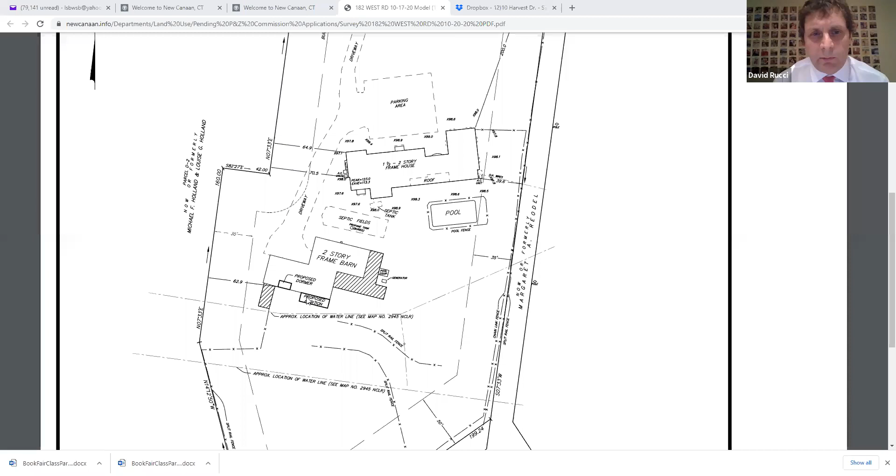Right now the particular... I'll let the Scatinos talk about the architectural part of it when we get there. But you can see on this survey that you're looking at now, the striped or hatched areas are the ones being removed. There's a small proposed addition on the back that just sort of bumps out the back of this particular barn. The sections that are being removed — if you could go to drawing number 4, please.

To go to drawing 4, I'll get it for you. Yes please, I just want to show you — actually Lynn, can you go to 7 first? I think that might be the easiest thing to show. The architectural drawings? No, just in the email I sent with the exhibits for the hearing. Oh, they're all up, everything is up. Do you want the architectural, or — we just labeled them based on how people would find them. They're just pictures. Oh, the pictures, okay, yes. It's listed as number 7. Okay, give me a second, I'll get it.

Sure, I just want to show the commission essentially what the building looks like today, and then I'll go through what our proposal is and what we're essentially taking off this particular building. It's important to note that the areas we are taking off are not seen from the street — you can't really see these. So here, if you see the existing barn, the front of it, that's essentially what is remaining, or a large part of it. There is a small area on the back side of the barn, about 12 feet, to be removed. And then you can see on the bottom what we're proposing to do. We're going to use all the same windows that we can, all the same refurbishing of the sides. We're going to keep the doors off to the left there, and the same windows and color. Essentially what we're trying to do is modernize it enough so it can be used on the property for something other than storage.

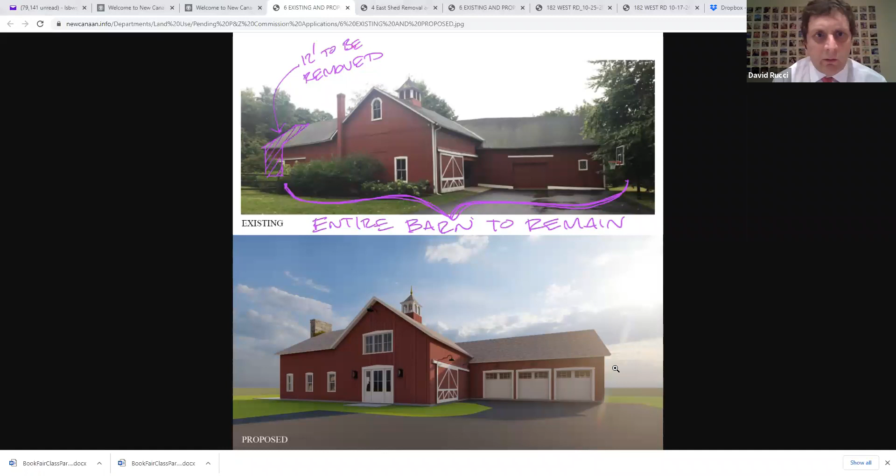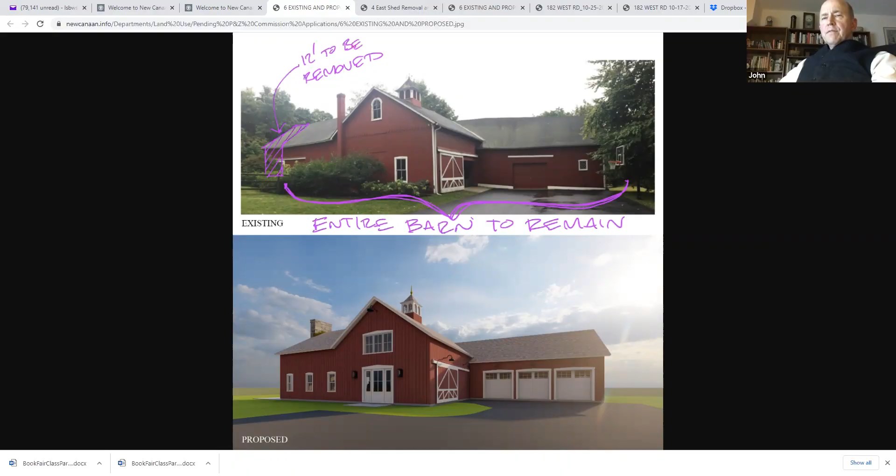Also, if you could go back to the photograph of the current building. Sure, that's number 7. Or do you want the proposed one? Or 6, is that the one you were looking for? No, it was another photograph of the side piece in the back that was going to be taken off. There's another photograph. That's going to be 4 or 5. That's what you're looking for. John? Yes, that's it, thank you.

The lower picture, I'm looking at, there was some pool equipment you have there, as well as some electrical on the side of the building. Since you're going to be expanding there, I'm wondering what's going to happen to all that electrical, mechanical stuff. Yeah, I can answer that. If you look at the proposed drawing on the east side, there'll be a new stone fireplace there and French doors. So all that pool equipment and any mechanical will be relocated to another location within the setbacks, obviously. So that has to be relocated.

And the construction materials for the addition, I assume it's going to be wood. Yeah, the current building has barn siding, it's pine, it's been painted. We were going to reclaim some of it and then install new boards where necessary, but try to keep the same width of the pine, etc., and patch where we have to. The idea is that it would be a sympathetic development to the 1700s barn as far as building materials and style. Totally, we're very respectful to this building.

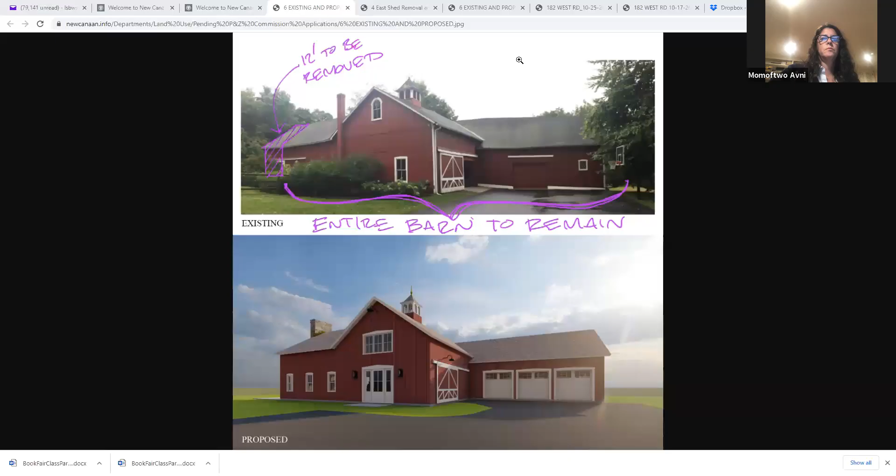That's the one you're looking for? Yes, just so they can see it. Okay, so this is Art Cassavant.

I have several questions for Mr. Scatino or Mr. Scatino Jr. I'll ask my questions and you can deal with them in whatever order. First, I presume this is a post and beam structure sitting on an original foundation. I presume you will not be building a new foundation, or will you? And what is the square footage of the residential area, excluding the garage?

Good question. I can answer the square footage first. It's about 4,000 feet of the first and second floor area minus the garage. I think that's pretty close, 4,070 feet.

The second question is also important. We've had our PE out there, David Seymour, a couple of times, and we want to preserve the stone foundation. Some areas are good, some will be removed and underpinned. It'll be selective. The front, correct me if I got this wrong James, was in pretty good shape, with some areas underpinned and patched. It's a case-by-case situation. On the left side, where we're putting the fireplace and there are new doors, we'd probably underpin that whole side, but it's a big part of the structure.

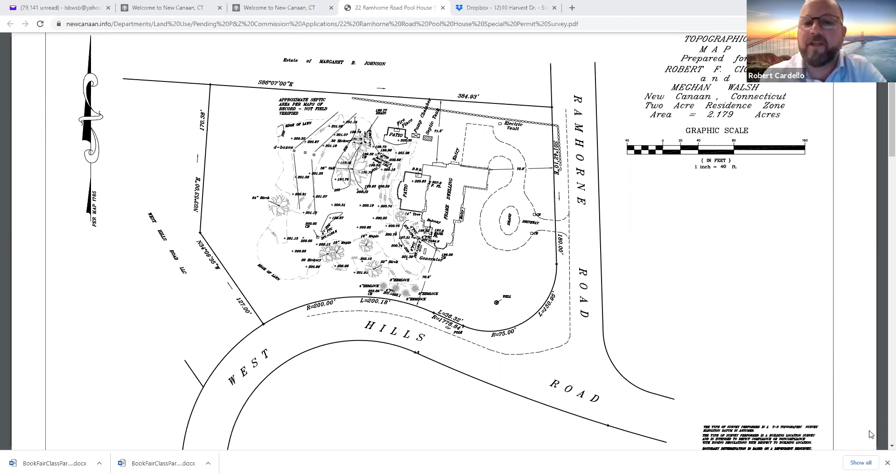The pool house has about 1,000 square feet, just under, of heated indoor space, and about 400 square feet of covered outdoor space.

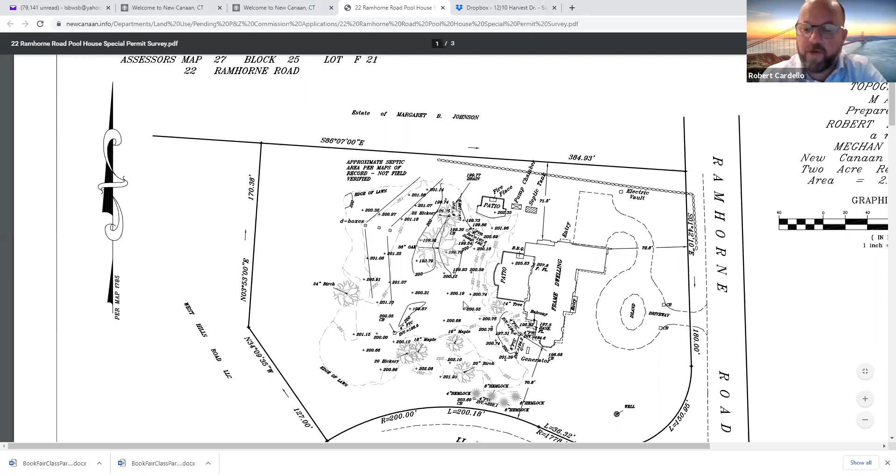We're here tonight to ask for a special permit under section 3.4-C7, with a pool house exceeding the allowable accessory structure size of 1,000 square feet.

And we are also asking for a special permit for section 3.4-C6, which is the accessory structure in the front yard. The closest point from West Hills Road to the existing house is 70.6 feet. The closest point from the property line to the pool is 66 feet. The pool house will be behind the pool itself.

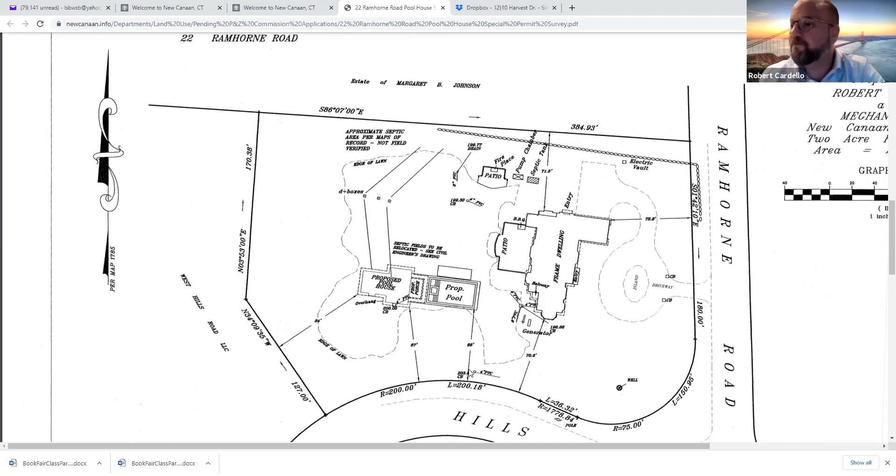I'd like to mention that there's no cooking facilities in the structure. The building conforms to building height.

I would love to give our civil engineer an opportunity to tell you a little bit about what he's done on this property to facilitate the drainage and the septic, and then maybe we could take some questions.

Please proceed. Sure, can everybody hear me? We can hear you. Oh, thank you. For the record, my name is Todd Ritchie. I'm a professional engineer with Milone and MacBroom.

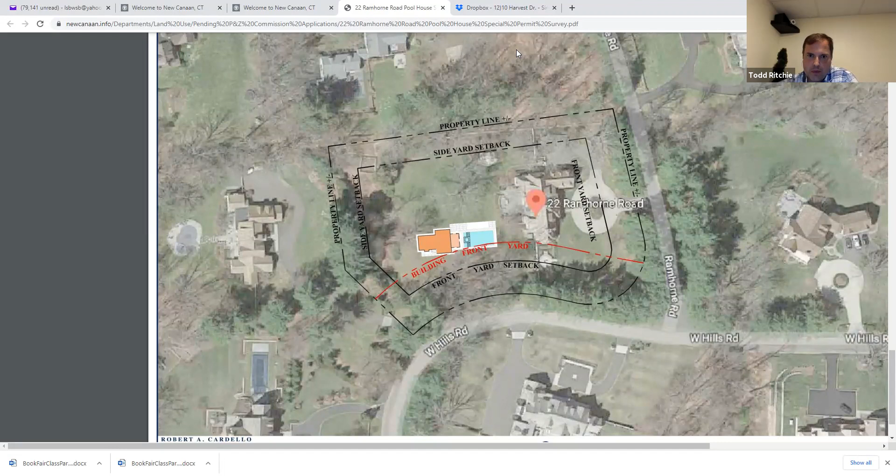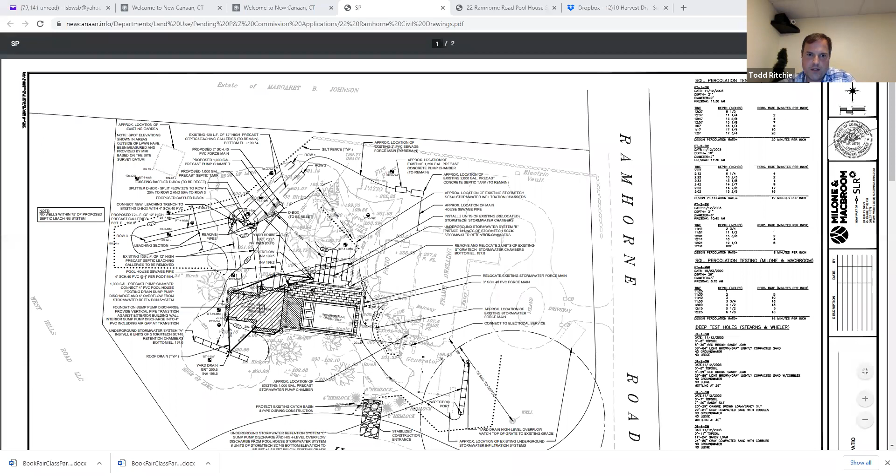I guess we could put up the site plan. Give me a second, but you can start talking. Okay, thank you. Just a little background—I had previously worked on this property back in '05, as Bob mentioned, as part of the original redevelopment of the property into the 6-bedroom house that's on the property now. We did the design of the site, the septic, and the drainage, so I'm familiar with the property. There's been some things updated over time that I wasn't part of, but originally I was part of the team. This is the site plan we put together associated with the pool and the pool house.

Just a little background on how the drainage flows on the site—the drainage patterns. Essentially the drainage flows to the east and to the west, and there's sort of a bowl in the back where the couple of trees are in the center, and part of the pool and pool house is within that area as well. Currently that drains and infiltrates into the ground through a stormwater infiltration system, and if it exceeds that, there's natural pathways towards the rear of the property. There's also a pump chamber at the walkout of the rear of the house that pumps water away from the house.

So for this proposal, we have to relocate part of the septic system because it will be within 50 feet of it with the proposed pool house. The pool itself has to be 25 feet from the septic, and since the pool house will have a lower foundation and foundation drainage, it has to be 50 feet away from any component of the septic system. So we're essentially keeping half of the system, the northern half, in place as it is.

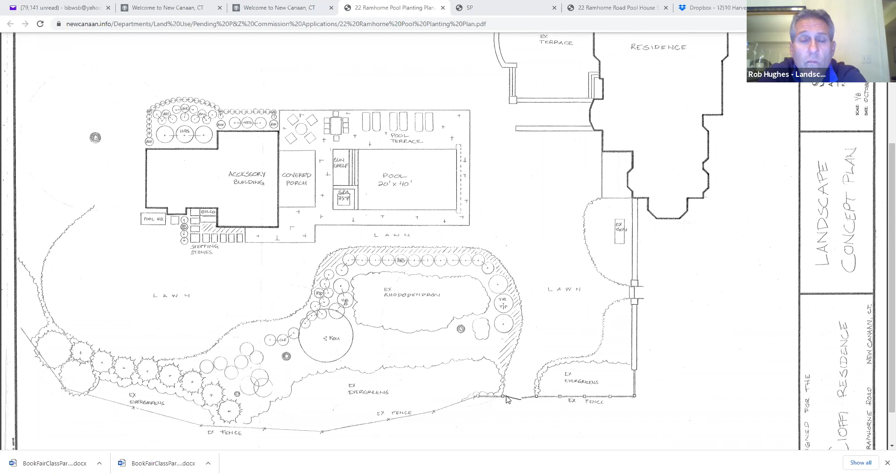Thank you. And Lynn, you all have your packets, I'm sure. There are some photographs of the rear yard that'll show you some of the landscape that's there now with the mature trees and plantings. Thank you to the board for listening to our presentation, and we look forward to hearing your comments.

Okay, commissioners, questions for the applicant, please.

Jack Flynn, what is the size of the pool house, please? That's under 1,000 square feet of heated space and about 400 square feet of covered outdoor space.

And how is the pool house partitioned? What is inside it? It's a golf simulator, primarily a full bathroom, and a small sitting area with a bar and kitchenette, not a full kitchen. As I mentioned, there's no cooking facilities, just an under-counter fridge, those details.

Could I ask a question, this is Art Cassavant, about the septic in the original structure. I'm assuming if the home was built in 2005 or thereabouts, the septic was new then? And part two of that question: normally there would be a need to designate a replacement zone in case the septic galleries or the tank itself needed to be replaced. Where would the replacement septic go, since I don't see anything designated on the chart?

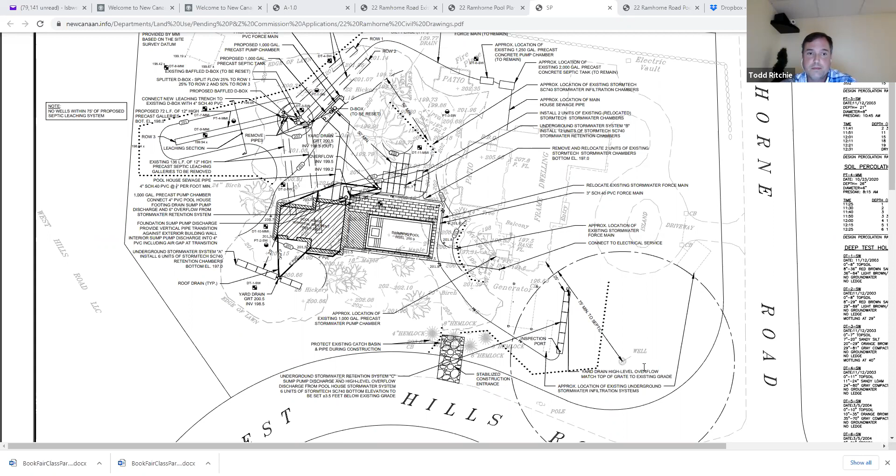So just to paraphrase what you just said, the need for the additional engineering testing was because of the addition rather than because of some existing problem. Oh, absolutely, yes. Okay, thank you. Appreciate that. Anybody else?

I had a question on the landscape plan. I don't see a list of any new plants intended for this area, with common name, Latin name, and so forth. It just says concept — I'm not sure what you're planning here. That's true, there are some abbreviations and designations of plants there, but you're right, they're not listed out with Latin or common names. That's an obvious addendum we can make as necessary. So what are you planning?

Well, there are quite a few evergreens out there already, quite a few existing hemlocks, so we would be adding some hemlock to that. There's also quite a bit of rhododendron, we would add that. Some viburnum, which is a nice naturalistic, shade-tolerant, large-growing shrub with fruits and berries for the birds. Clethra, and a couple different varieties of hydrangea.

So those are the general plants, and they can be listed out easily enough. Are these all native to our area, the plants you intend to put in? Majority are native, I don't think they're all native, but it's not a wetlands remediation plan, nor were we trying for a naturalistic garden as much as screening and buffer, some natural planting to go in with the existing woodland planting that buffers the pool and pool house from the road.

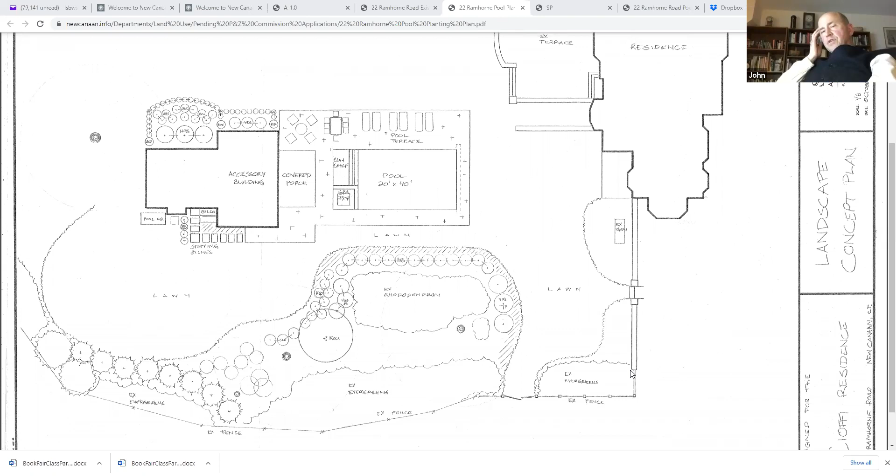Well, our POCD encourages native plantings, particularly ones that are pollinator and bird friendly. They're definitely pollinator and bird friendly. As I mentioned, several of them have flowers for pollinators as well as fruit for the birds. I would just find the application more complete if there were details on what's being intended, so we can fully evaluate the landscaping plans, which I'm not getting from the concept plan.

Okay, we can certainly adjust that as needed. It's more decorative planting around the pool house, which faces the main property, and it's more evergreen and thick buffering planting along the West Hills side of the property. Thank you. Okay, any other commissioners?

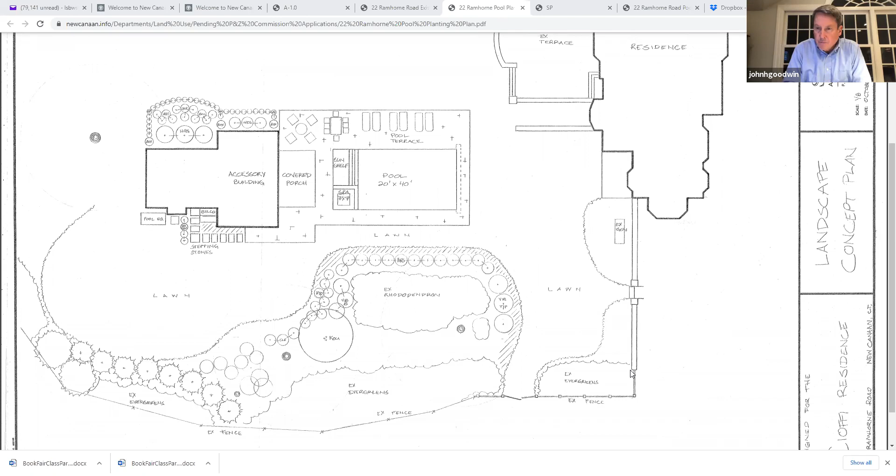Dick Ward: Is the pool house building going to be insulated in any way so that it's winterized and usable? Yes, they will be using it in the winter months to use the golf simulator.

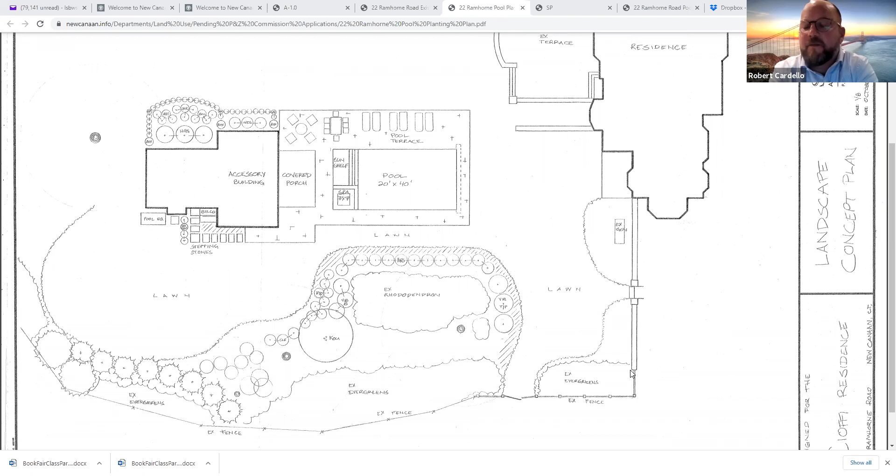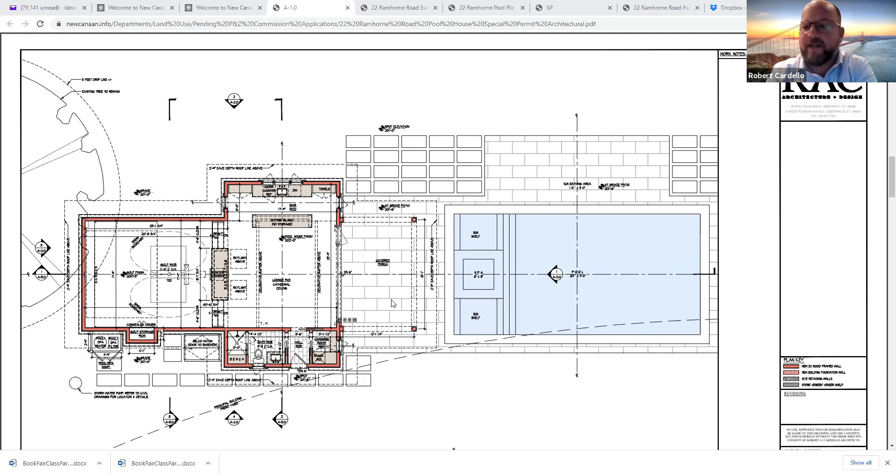Is there a capability of a bedroom? It's one open space. If you look at the plan, the bathroom isn't contiguous, even if you took the golf simulator room, which is arguably at a different level than the rest of the pool house. You actually step down into it because you need that extra ceiling height. So looking at the plan, you can see it doesn't really facilitate a bedroom. I suppose you could put a wall up, but you're going down 3 feet into the space that would be the golf simulator, and the access to the bathroom is not in an obvious place. The intention is not to have it be a dwelling unit of any kind.

Okay, thank you. Any other commissioners? Okay Lynn, let's open this up to the public. Would anyone from the public like to address this application? I don't believe we have anyone from the public, just the next applicant. Okay, commissioners, we're all set, right? Yes. Okay, this application's closed.

Very much. Okay, item number 3, let's make some decisions. Since it's fresh in our mind, let's start with 22 Ramhorne Road. Commissioners, do I have a motion for approval or denial of this application? I move we approve it.

It's Claire Tiscornia. Reasons for approval: it seems like it fits in with their yard. I don't think it's going to be imposing on the neighbors at all. It seems like a fairly simple pool house. The only condition I would add is to have an addendum placed on it with a list of landscaping, what plantings are planned to be planted for this project. But other than that, I think it's just a pool and a pool house, and as long as it seems like their drainage plan is very extensive, the professional engineer has done a good job. So I move for approval.